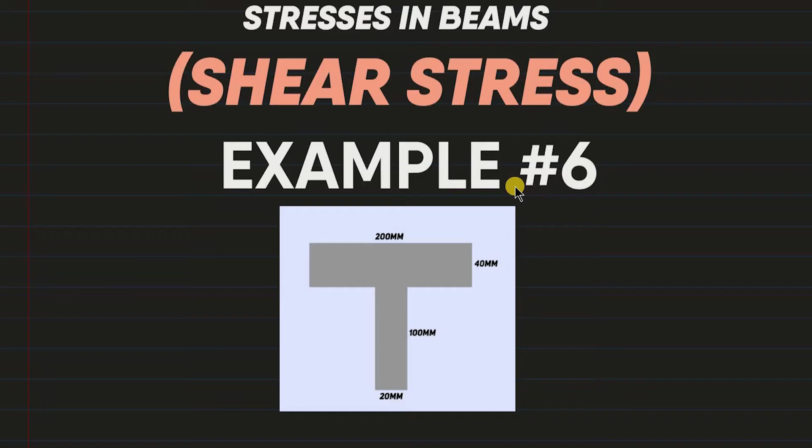Makikita natin mga bees, andito po yung ating section ng ating problem or ng ating beam. Sabi dito, the cross-section of a beam is a T-section, kaya letter T, of overall depth 140 mm, kaya 40 plus 100 equals 140. Width of flange is 200 mm, and thickness of flange ay 40. At yung thickness naman ng web, this vertical part, is 20 mm.

Ngayon, ang gusto niyang gawin natin is to draw the shear stress distribution diagram if it carries a shear force of 60 kilonewtons. So alam natin ang value ng ating V, 60 kilonewtons. Kailangan daw nating sketch yung shear stress distribution diagram.

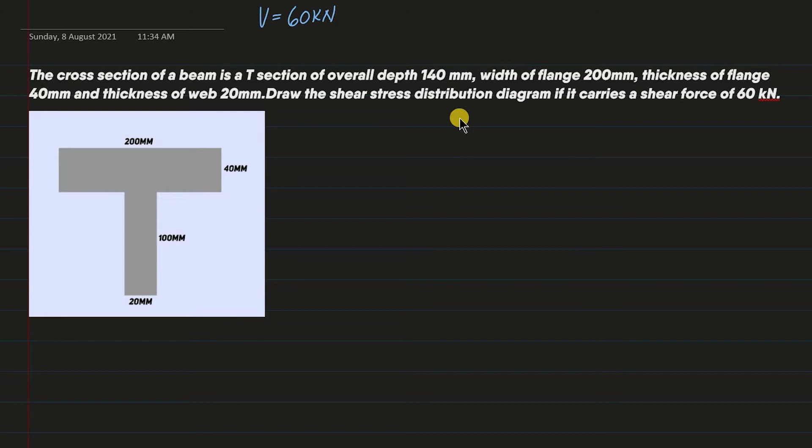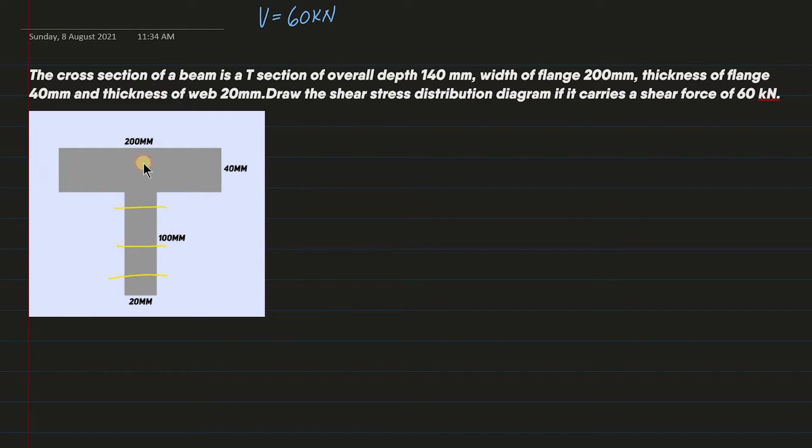Okay, so ano ba itong shear stress distribution diagram? Alam natin na at different levels, magkakaiba yung value ng ating mga shear stress. So ito, it is just showing kung ano yung mga values at certain parts. Kung ito yung ating beam, ang shear stress distribution line would look something like that, or depende mga bees. The shear stress distribution depends upon the section, so iba-iba yung itsura niyan per section.

Ngayon, pinapakita niya na at this level, makikita natin dito kung ano yung value ng kanyang shear stress. Let's say 20 PSI, o let's say nasa 15 PSI siya. Okay, so yun yung main role, yun yung gamit ng ating shear stress distribution diagram.

Ngayon, paano natin to mai-sketch? Alangan naman na kunin natin yan per like 5 cm interval o per millimeter, that would take too long. So ngayon, ang kailangan lang nating hanapin mga bees ay those peaks lang, yung mga iyan, o ito lang, at yon. Yan lang po yung kailangan nating hanapin, those are the essential parts that we need to determine.

So at this point, at these peaks, kailangan nating hanapin kung ano ang value ng shear stress. So how do we know where can we find those peaks? Those peaks are commonly found first, at the neutral axis, at the neutral axis or at the junctions. So at these locations, kailangan nating hanapin ang value ng ating mga shear stress.

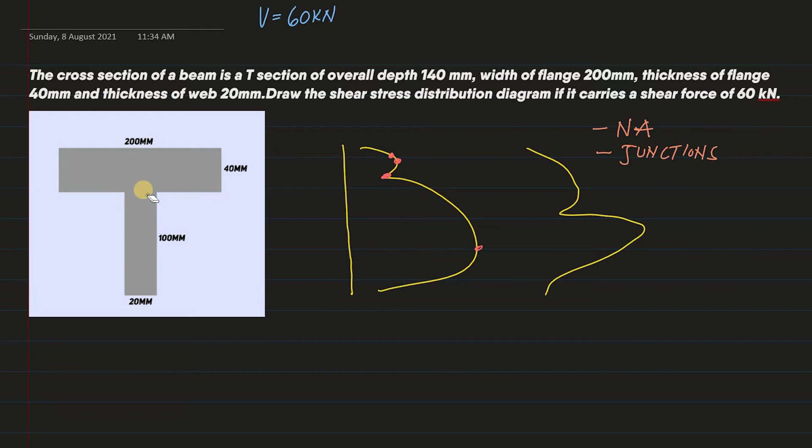Kasi alam natin na at the neutral axis, this is a candidate for the maximum shear stress, at alam natin that these peaks are the location of our maximum shear stress. At also sa mga junctions, dito sa mga junctions, these are also concentrations of shear stress, so possible na magkaroon dito ng peak ng ating shear stress. Okay, so yeah, that's it.

Ngayon, we are going to solve our shear stress at the neutral axis and our shear stress at the junction, o kung saan nag-connect yung ating web at flange dito. Okay, so paano natin yan gagawin?

First, we need to locate the location of our neutral axis. Kasi unsymmetrical ng ating section, hindi natin alam kung saan yan. Unlike kapag symmetrical yan, alam natin na sa sentro agad yan, pero hindi eh. So ang kailangan natin gawin ngayon is to set a temporary reference point, let's say dito sa pinaka-bottom. Itong temporary reference point kahit saan yan mga bees, it's okay.

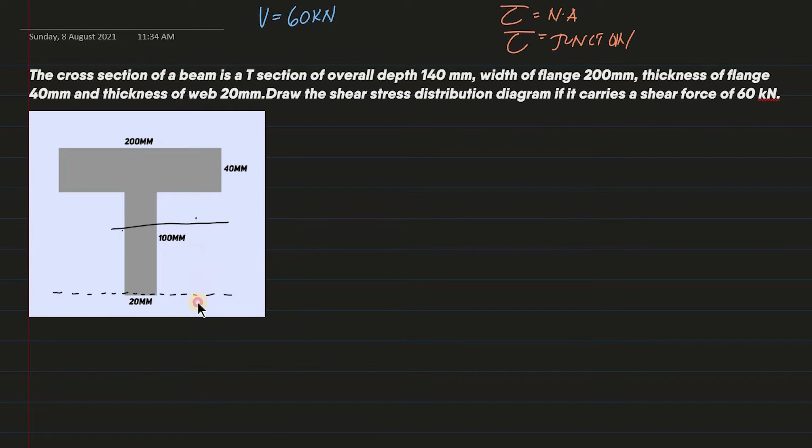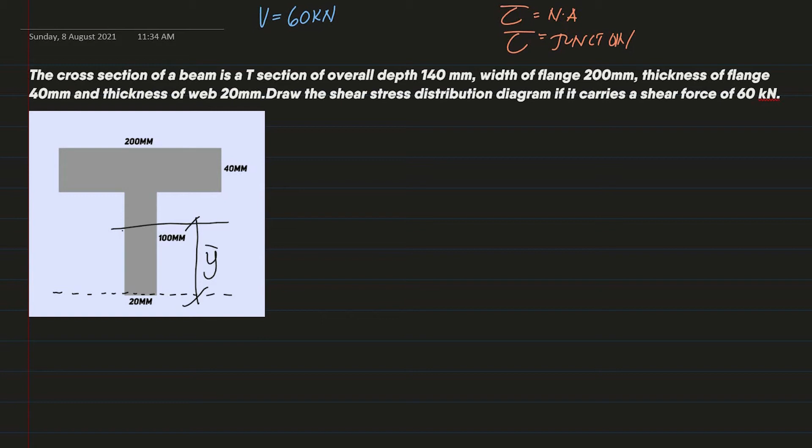And then let's set here a value or a variable, bar y. Ito yung kailangan nating hanapin, itong bar y, para ma-locate natin yung location ng ating neutral axis. Okay, so to solve that, from statics, meron tayong formula na bar y is equal to summation of ay over summation of area. So hatiin po natin yung ating

T-beam into two parts. First, yung taas, ito, and then next is yung sa baba, ito naman, yung web tsaka flange. Okay, so dito sa web, ano yung area nito? Ang area nito is equivalent sa 100 times 20, so that's 100 times 20.

Ngayon, ano itong y? Diba, summation of area times y. This y is the location of the centroid of this figure papunta sa ating temporary reference line, dito. So what's this length? That would be equal to 100 divided by 2, which is 50. Okay, plus, kasi nga summation, itong isang figure sa taas, yung flange niya. Ano yung area ng flange? That's 200 times 40.

200 times 40. Tapos, ano yung distance mula dito sa centroid niya punta sa ating temporary reference line? That's equal to, yung ito lang ay 20, di ba? Kasi 40, i-divide natin sa 2 kaya 20. 20 plus yung buong ito ay 100, so 120 yung buong ito. Okay, so times 120 divided by the summation of areas.

First, yung area ng ating web, ito 100 times 20 plus yung area ng ating flange. That's 200 times 40. Okay, so ngayon, pwede na natin yung i-calculator and we can find the location of our bar Y. Okay, so ang sagot natin mga bis ay 106 millimeter.

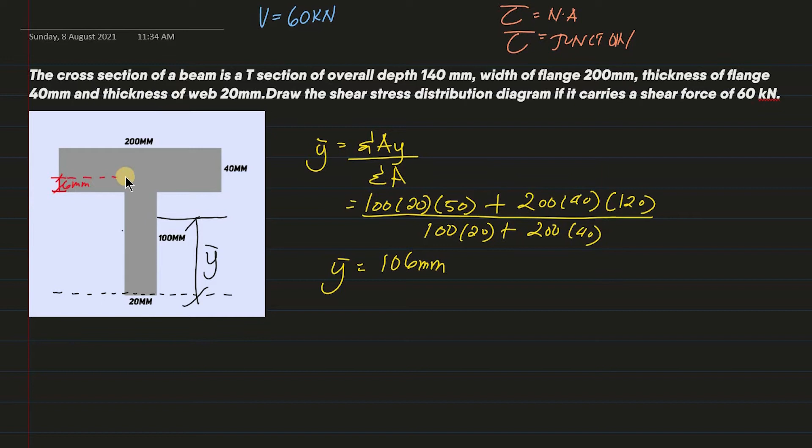Okay, so from the bottom, we should go up 106 millimeter and yun yung magiging location ng ating bar Y. So that means mga bis, no, that our neutral axis will be located 6 millimeters dito sa ating flange, di ba? Kasi that's 106, di ba? So 6 millimeter from the bottom of our flange dito. Okay, so dito na yung magiging location ng ating neutral axis. So this is our neutral axis.

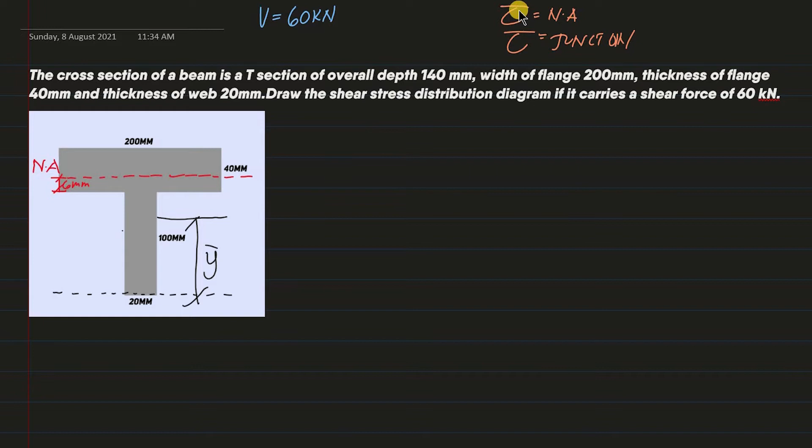Okay, so ito, hindi na natin to kailangan. Okay, so since alam na natin yung location ng ating neutral axis, so we can start to solve our shear stress at the neutral axis. So ano ulit yung formula natin? That's VQ over IB. Itong V given na, that's the shear force. Okay, next mga bis is yung I or the centroidal moment of inertia. How will we solve for that?

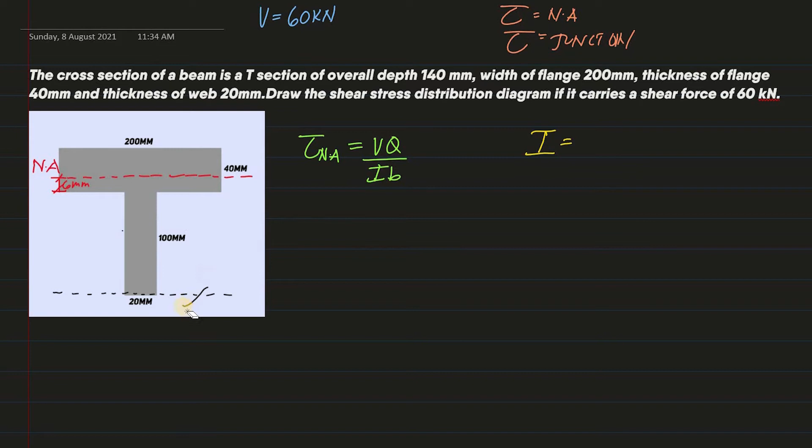If you would take it a look mga bis, no? Hindi na symmetrical yung ating section. So, we have no choice but to use parallel axis theorem or the transfer distance method. And para gawin yon, hahatiin natin to into two parts para mas madali. Dalawang rectangle, okay? Yung flange, yung centroidal moment of inertia ng flange, i-add natin yan sa centroidal moment of inertia ng ating web. Okay, so sa flange, since rectangle yan, that's gonna be base times height cube over 12.

Tapos, since parallel axis theorem nga, i-add natin yung area ng figure na to multiplied sa y squared. So, ano itong y? Y squared is the distance mula sa centroid ng certain figure papunta sa ating neutral axis. So, that's that distance, okay? And alam natin na this will be equal to, since yung kalahati nito ay 20, di ba? Kapag ito, yung buong ito ay 40, and alam natin na this is 6 mm. So, this length will just be 20 minus 6. So, alam natin na ito ay 14 mm.

Same din. Punta tayo dito sa ating web. Plus, sa ating web, same din. Kung makikita natin, our web is rectangular. So, base times height cube over 12. Plus, yung ating AY squared.

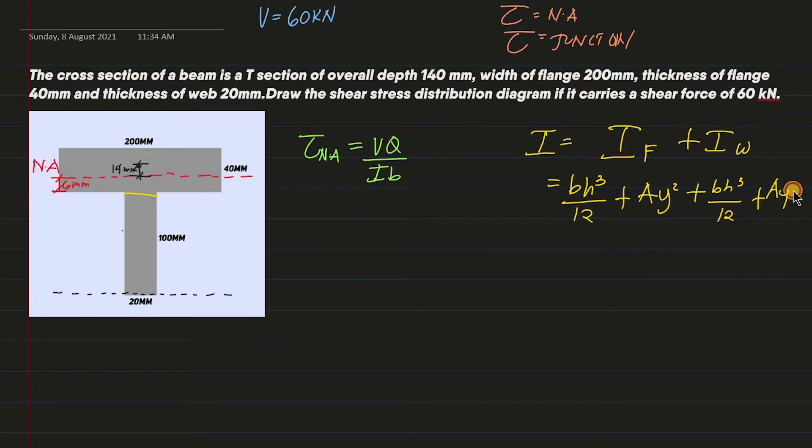Ngayon naman, ang location ng centroid yan is of course dito, 50, ito, that would be equal to 50 mm. Kasi di 100 yung buong ito. That means that this is just 50 millimeters. And from this point, papunta sa ating neutral axis, that's equal to 6 mm. So, pwede natin yung i-add and makukuha natin yung value ng ating y. That's just 56. Okay? So, ngayon, substitute na lang tayo.

Simulan natin sa ating flange. Sa ating flange dito, ano yung base natin? That's 200. Ano yung height? Ito, that's 40. Okay, naka-cube yan, divided by 12. Plus, ano yung area ng ating flange? That's 200 times 40.

Tapos, ano yung value ng ating y? Yan ulit, yung value ng ating y is centroid to the neutral axis. That's 14 mm. 14 squared. Okay, so punta na tayo sa ating web. Ano yung base niya? That's 20 times the height. Ano yung height niya? Yung buong ito ay 100 mm. That's cubed divided by 12 plus.

Ano yung area ng ating web? That's 100 times 20. Okay, so 100 times 20. Multiplied yan mga bis sa ating y. Y is the location from the centroid of our web to the neutral axis dito. So, that's 50 plus 6 would be equal to 56. So, this is 56 squared.

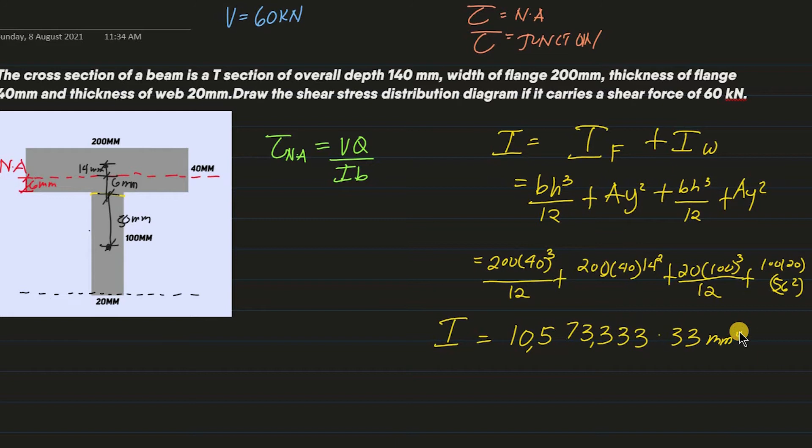10,573,333.33. So this is 123, 123. So 10,573,333. Ang ating unit ay millimeter raised to 4. Okay? Okay, so nasolve na natin yung ating centroidal moment of inertia. I will just write it here para di natin makalimutan. That's 10,573,333.33 millimeter raised to 4.

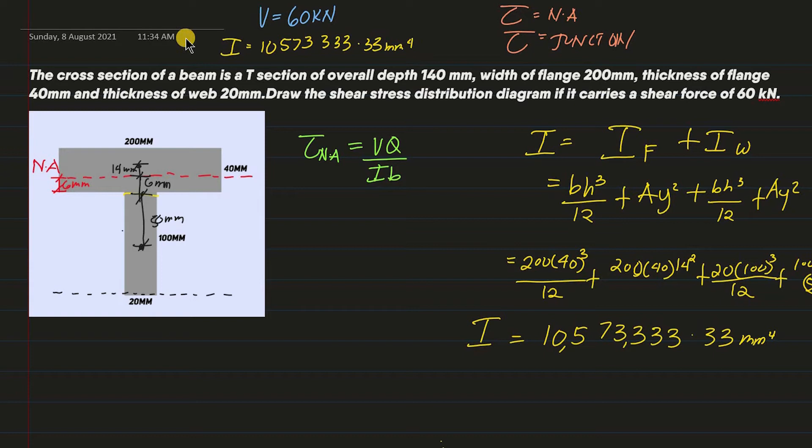Okay, so with that given, pwede ko na itong i-erase. Di na natin to kailangan. Ayan, so erase ko lang yan. Boom! Okay, so now mga bis, okay na yung V, okay na yung I. Next is yung Q or the first moment area. How will we solve for that?

Madali na lang ito. So, first moment area would be equal to, pipili tayo kung anong i-consider natin - yung sa taas ba ng neutral axis or sa baba. Of course, pipiliin ko yung nasa taas kasi isang rectangle lang yan. Kapag nasa baba, mas mahirap yan. Pero kahit anong piliin nyo dyan, it will still give you the same answer. But choose the one that makes your life easier. So dito sa taas, ano ba yung area ng above sa neutral axis natin?

Alam natin na yung ito ay 6 mm, so the remaining here is 40 minus 6, which is 34 mm. So ang area nito would be equal to 34 times 200. And we need to multiply the location ng centroid of this figure papunta sa ating neutral axis, and that's just 34 divided by 2. Yun yung location nito papunta sa ating neutral axis. So the value of our Q at our neutral axis would be equal to 200 times 34 times 34 over 2, it is 115,600 millimeter cube. Okay na rin yung ating Q.

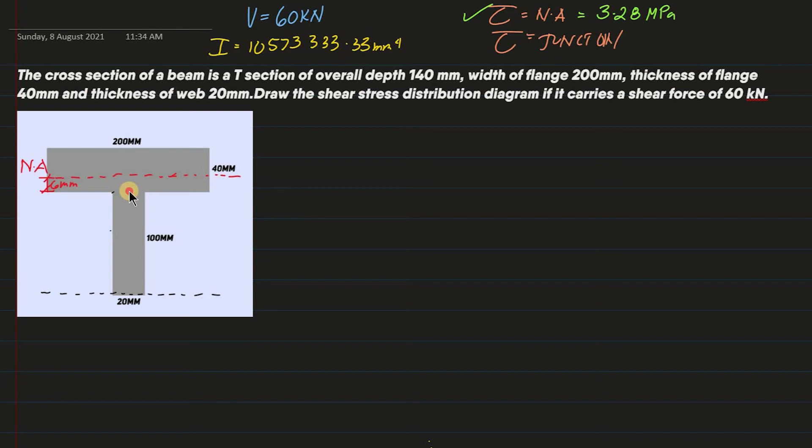Erase ko muna yung mga to. So ang iso-solve naman natin ngayon is the shear stress dito sa ating junction na to. Tignan natin ulit sa ating formula - our shear stress is equal to VQ over IB. Itong ating V, constant yan, di yan nagpapalit, 60 kilonewtons. Same likewise sa ating I. So yung kailangan lang nating i-solve dito is yung ating Q, magbabago yung value ng ating Q. Remember, yung ating Q and B, yan lang yung ating varying factors. V and I, that stays the same.

So our Q at this junction would be equal sa area ng top or bottom - parehas lang if we decide it at the top or at the bottom. Kapag sa taas yung pinili natin, ano yung area nito? That's gonna be equal to 200 times 40, times yung location mula sa centroid nito punta sa ating neutral axis. Since alam natin na ito ay 40, ibig sabihin yung kalahati nito ay 20 millimeters, half lang. So para makuha yung distance na to, that's just 20 minus 6, which is equal to 14. So makikita natin that the value of our Q is equal to 200 times 40 times 14, equal to 112,000.

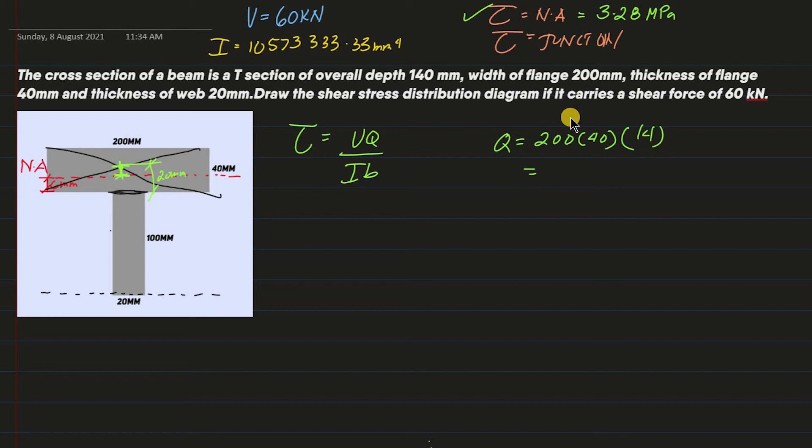So how if yung pinili naman natin is yung below? Parehas lang, it will still give us the same answer. Kasi diba, yung sinosolve natin is at the junction, parang ito yung reference line natin, so we choose either top or below. Nang pinili natin yung taas, ito yung nakuha natin. Pag pinili na natin yung baba, we will still get the same value of Q or the first moment area. So ano yung area nito? That's 100 times 20, and then we multiply the location or the distance from the centroid of this figure to our neutral axis. Anong length yan? This is 50, yung natitirang ito lang ay 50.